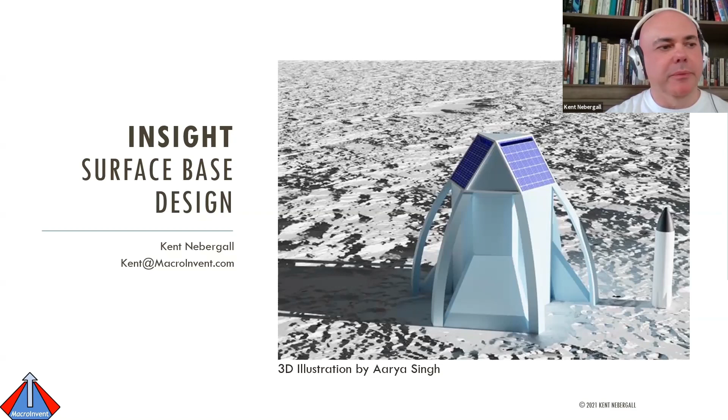So there we go. This is my usual table of the grand challenges of space settlement. If you've been to any of my talks for the last few years, you've seen this before. It starts at the top left with each column representing the challenges at a given distance from Earth.

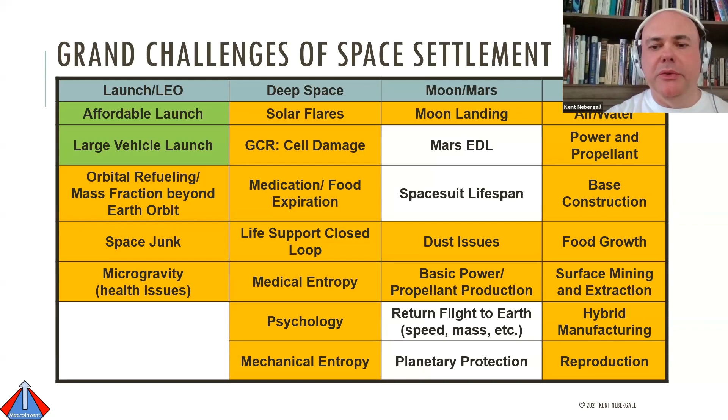SpaceX Starship breaks the top corner, which enables the path forward. By using Starship as a foundation, we open all the challenges shown in orange. This allows us to solve most of the problems of becoming a multiplanetary species.

So in 2019, I presented a 1,000-person settlement on Mars called Eureka. Since it was a surface study, it did not cover issues like orbital refueling or debris. So the following year, I presented Starport. This was designed as a logistic solution, but it also lets you put a large space city of up to 1,000 people anywhere in the solar system.

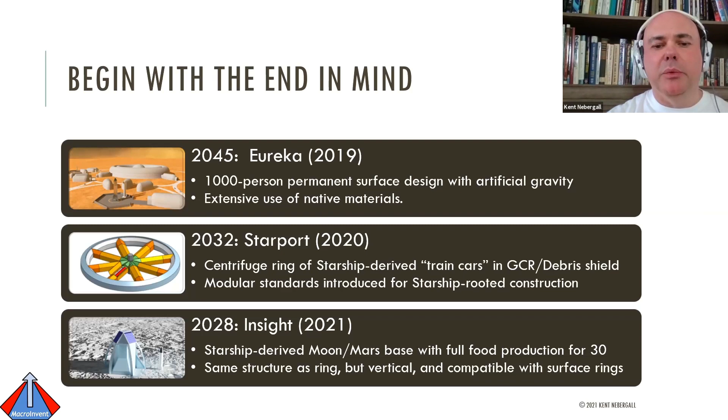However, there's still a major gap between first landings and permanent outposts. So this year, we closed that gap with the Insight surface base. The principle is simple. You must transition from ships to ports to make any permanent gains. Otherwise, you're just visiting.

So the transition from exploration to commerce is complex because many of the engineering goals are the exact opposites. Exploration means traveling light for short periods. Exploration systems like Apollo do not translate well to heavy permanent structures for long-term habitation.

They also have custom systems for each piece that are not necessarily easily replaced 5, 10, 15 years down the road. So even with Starship, the conversion is complex because the two design languages are entirely different. We need to think a bit more like plumbers and electricians maintaining a 100-year-old house than rocket scientists.

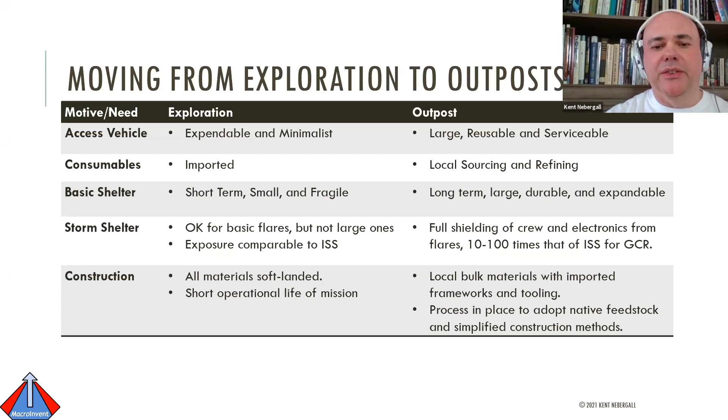So on to Insight. There are 3 main building types. This is the outpost habitat. To build this, we start with 4 lunar starships or Martian starships next to each other on a foundation. Then we build the walls to block radiation and thermal stress around them. The walls are built with frames brought from Earth initially.

These frames can then be filled essentially with interlocking sandbags. These bags are filled with moon dust and sintered with microwaves and settled in place. We'll talk about the Martian version of this later.

And settlers would then use the extended tower workspace like an unfinished basement or garage. They would determine how much atmospheric pressure it can hold and then extend living, working and agricultural spaces into that volume just outside the door.

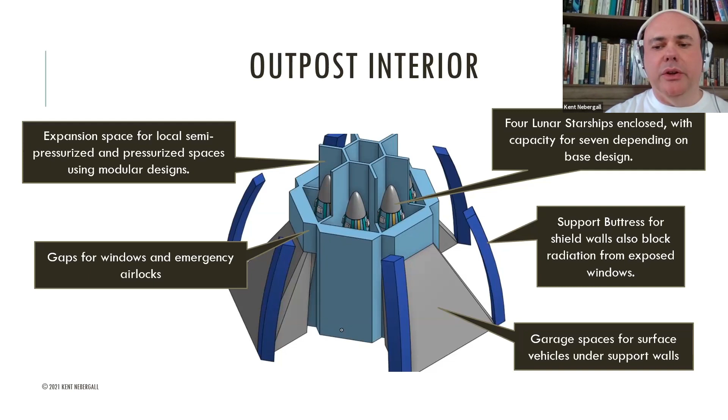In these early stages, the fuel tanks in the starships would be converted to LED greenhouses to sustain the outpost. One starship could feed and house 10 settlers in this way, with the fuel tanks being the greenhouses and the upper parts being the living quarters. This drastically reduces the food imports from Earth. It also allows each tower in this configuration with 4 starships to hold 40 people.

The exterior of the structure has emergency solar panels, fiber optic light gathering systems for the greenhouses, and periscope windows. Using the periscopes like this gives the settlers at any level of the habitat a top floor view. And note the lunar starship over here to scale. This is your periscope window along the top edge here.

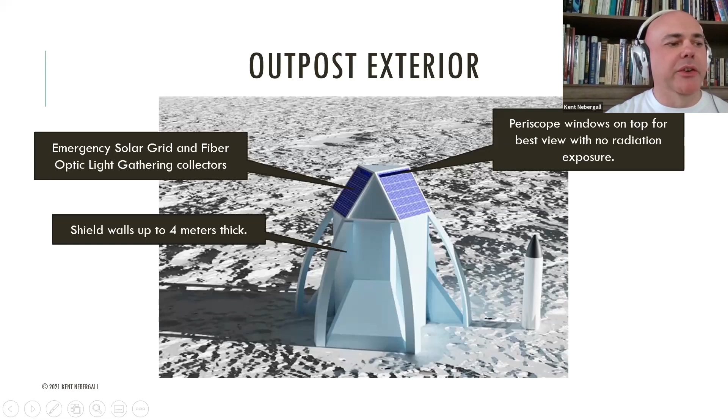And the flying buttress construction, frankly, is to make it look a little less brutalist. I wanted to make something elegant, not ugly. The hexagon structure has a 22-meter baseline to keep the foundations future-proof. I wanted these hexagonal structures for space settlement to allow for future starship designs up to 18 meters in diameter or larger. Elon Musk mentioned in a tweet one time that this was the maximum size that a starship could be.

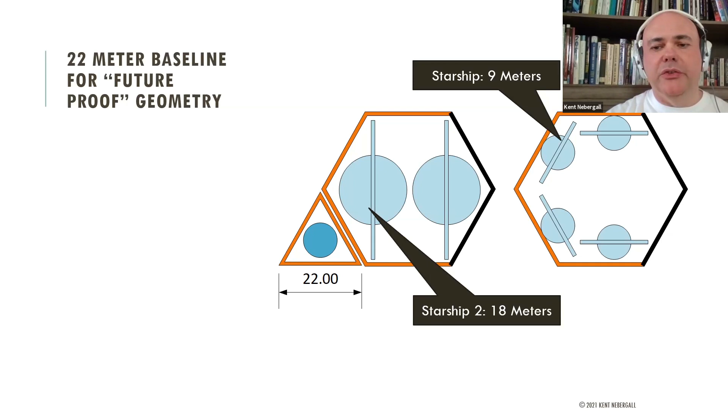Settlement designs must have an architecture that can be maintained in living economies over centuries, just like our homes do today. You want standard sizes for construction, pipes, brickwork, and so on to be able to do ongoing maintenance.

Now on to the spaceport. The goal of the spaceport is to get the exhaust plumes from arriving spacecraft as far away from the surface rock as possible, particularly in the case of the moon, because you can actually eject dust and rocks into orbit and have it hit you weeks later.

In this configuration, a visiting starship's exhaust plume is never closer than 100 meters from the surrounding surface. The angled panels have an open-face pattern of Tesla valves that redirect the plume back on itself. This would help protect the panels from blast damage.

And yes, the elevator was inspired by the ones from 2001 and Space 1999. You would basically lower the vehicle directly into the center and then push it off to the side to do maintenance. An area within the vicinity of the landing site would also be scrubbed of dust during the construction process, because you needed that to build the sandbags of the structure.

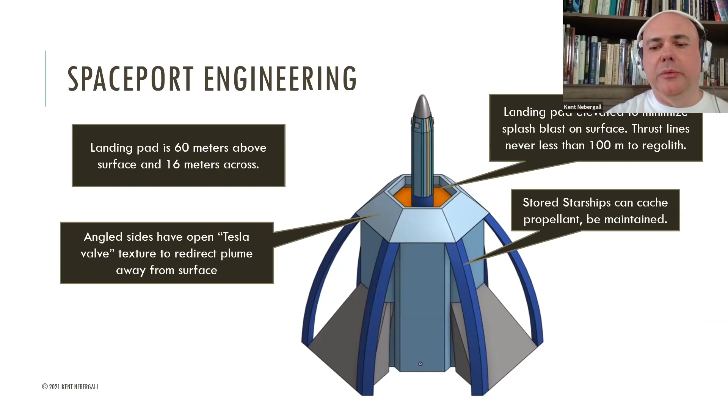If you added a tower similar to the ones being built in Boca Chica, then you could use the catch arms and also have easier crew access. As with Habitat, you could put up to 7 starships on the inside, and some of those could be converted to fuel storage with the oxygen made locally on the moon, or both propellants on Mars.

So a little bit about power supply and demand. The greenhouses that I mentioned, if they are LED based, especially during the lunar night, or during the global dust storms on Mars, you have the same problem where you just need to be able to maintain lighting. Those would actually consume the vast majority of the power for the base compared to the human operations.

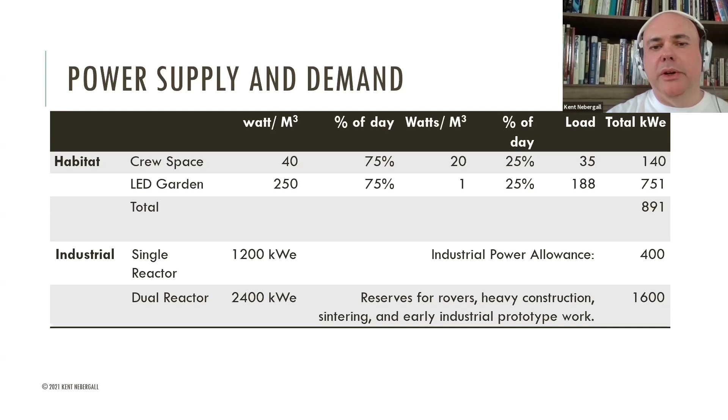So the basic idea here is that we have a power plant that is meant to be cheap, long-lasting, and low maintenance. So we use low-enriched uranium, similar to the systems that were described yesterday in the nuclear power thing. Those systems can actually last 200 years without refueling. It's not nearly as much power, but it's much more consistent, much easier to maintain, and much safer. So you make the plants bigger, but at these scales they can still be very powerful but not very large. So these are basically shipping container sized systems with large radiators.

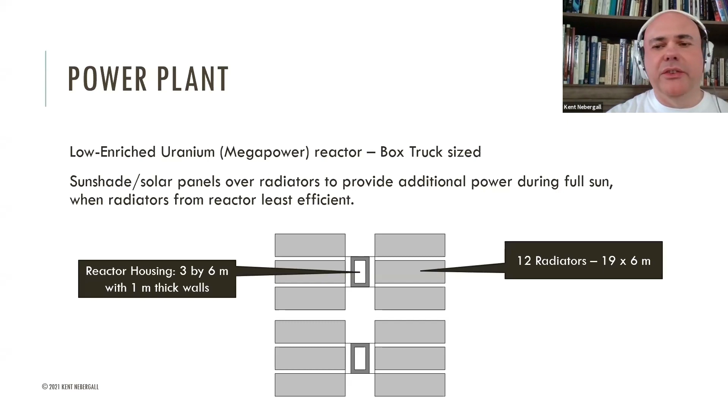On the moon, you would actually use solar panels to shade the radiators to increase the efficiency during the daytime. And then at night, of course, the radiators would work at full capacity because they would be just radiating directly into space. They wouldn't have to worry about sunlight offsetting their ability to radiate energy.

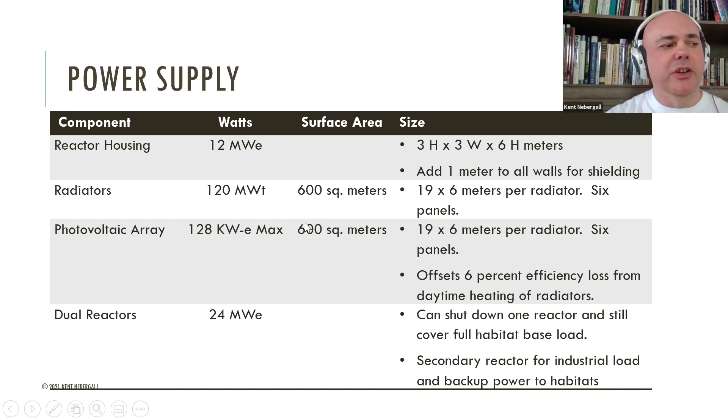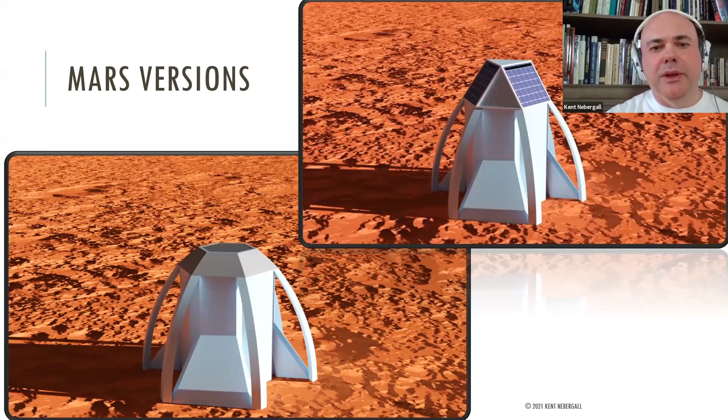So here's the Mars version, and yes, I did just tint the background, but we're going to get into a few more differences here. This goes back to the original Eureka design. Basically, the outer layer of the system is water ice that is reinforced with either a fiberglass or other sort of matrix. This goes back to the idea of Pykrete, which was invented in World War II and was basically sawdust reinforced ice that was almost as hard as concrete. They later found that if you use newspaper, you could actually make it as strong or stronger than concrete.

So in this case, we would be going all out and going with something more like fiberglass or Spectra line or something like that inside the bricks. It would basically almost be like steel wool in there, but it would be laid out specifically along those patterns. And those would simply be deflated and inflated on the surface and then filled with water and frozen into place.

The seals between the gaps here are exaggerated in scale, but the nice thing about these is that if the brick expands, it stretches in one direction, and if it contracts, it stretches in the other direction, but the seal is maintained. You'll see these in log cabins for the boards, and in decks for docks and so forth. So it's a very common technique for maintaining a seal.

The outer layer would be water ice. The inner layer, you could probably use something more like the surface clays to make something more akin to a ceramic brick for the inside, because the room temperature on the inside is not going to be conducive to maintaining that ice layer on the inside. But this allows for good cosmic ray shielding because water ice is a better material for that.

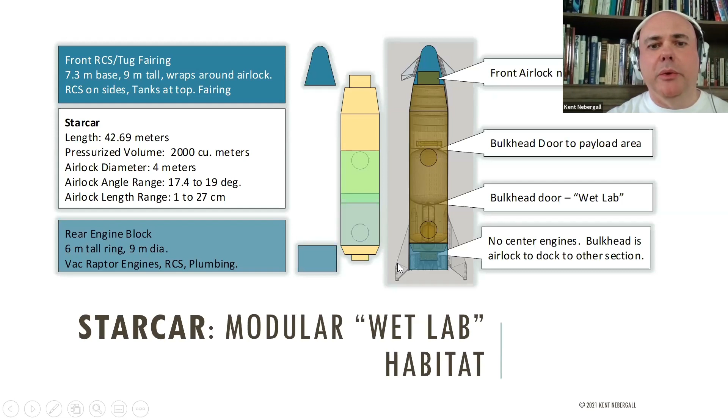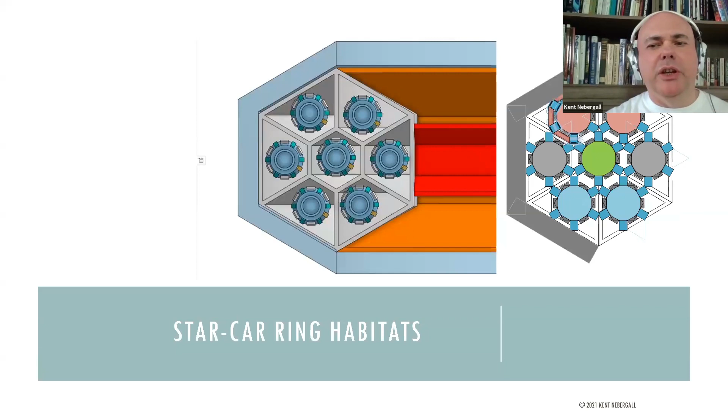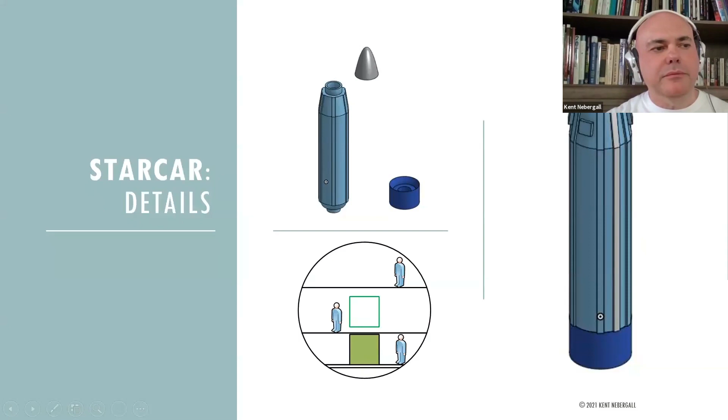where you're able to go from one car to the other through a vestibule. So if you arrange 7 of these in a hexagonal track on the same planform as the surface base, this is basically the surface base turned 90 degrees, then you could actually get 1,200 people in a ring like this. This is getting a little bit into details. You've got this 2-meter high passageway through here and so on. So it's rather interesting arrangement.

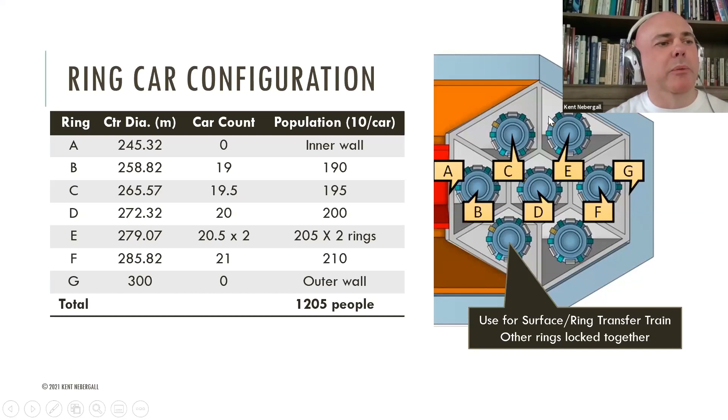I did redesign this a little bit from last year, and I did change the dimensions very slightly, but we can still get up to 1,205 people. These are all the specifics of how many cars and so forth. We would have a half car length system up here, so basically without the fuel tanks in one block on these top and bottom rings to get that half length arrangement.

And then if we do a centrifuge on the moon, we can boost the gravity up to a little over 3/4 Earth gravity. On Mars, we can go all the way to one Earth gravity around the same speed. The bank angles are slightly different. The RPM is almost identical, and we're basing that on this center line here.

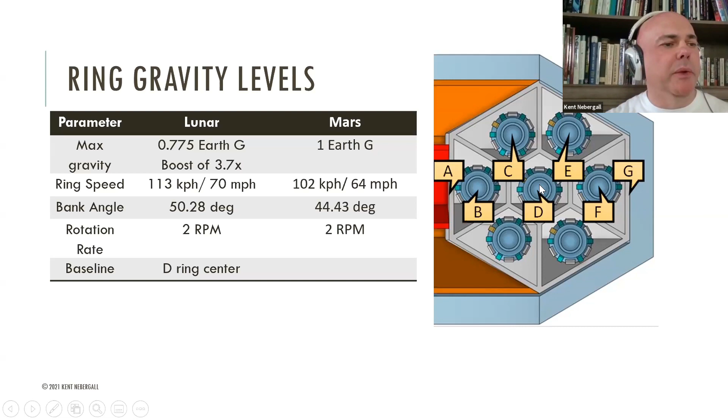And then we have the lunar outpost here. We have a similar outpost on Mars, and this is our logistics system. Since you're talking about launching 1,000 starships or 500 starships to Mars every 26 months, this gives you the ability to have them all fueled, stored in high orbit, and ready to go at once, rather than trying to get them all going in sequence at the last minute.

So in conclusion, we have a system that can handle anything from 10 people to 10,000 people within any of these environments. We make very minimal changes to Starship. We take advantage of local materials, and we provide a bridge between surface exploration and building full ports and cities on the surfaces of the moon and Mars, and also in deep space in the vision of the L5 Society and so forth. And we start breaking the problem of being able to grow food in space. So that's all we got.

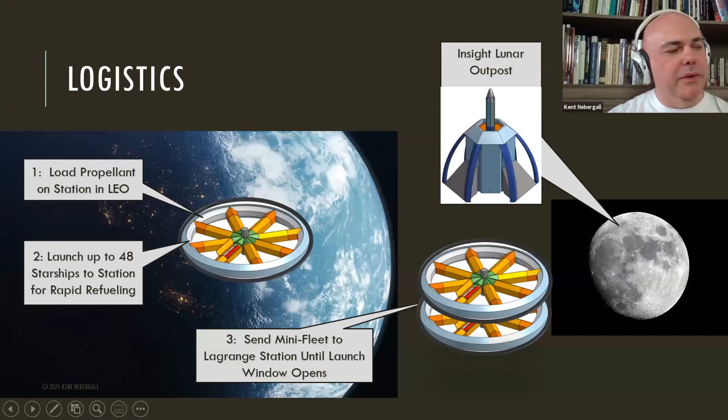Question, how would you create your magnetic field? Just electromagnets. They could be done passively, but the advantage of an electromagnet is that if there actually is a major storm coming in, you could then amplify it. And the other thing is that when you're putting that many magnets and bolting them to something, there's going to be field interactions that may affect the structural integrity because you're augmenting the structure itself. So you'd want to be clever about how you arranged it so that if there's some major event outside, like a meteor hitting, you could actually reinforce the structure by adjusting the magnetic field.

Okay, and closely related, are you thinking of making use of water for radiation shielding? In the case of the Mars one and the low Earth orbit one, yes. On the Moon, the problem is that if you put water and it gets near boiling point during the daytime, that's not going to work so well. You might be able to do it at a polar base or in a lava tube, but out on the surface, you can't really just use water like that. You have to use regolith.